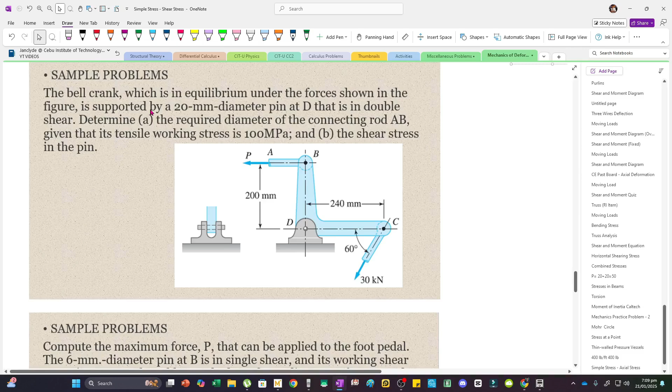Now, this problem, where did this come from? This is from the midterms of CC2 in my batch. So, this is a famous problem in CITU, especially when you're already a 4th year.

The bar AB is supported by a frictionless inclined surface at A and a 7/8 inch diameter pin at B, which is in double shear. Determine the shear stress in the pin when the vertical 2,000 pound force is applied. Neglect the weight of the bar. So, assume this as weightless, and this is an applied force of 2,000 pounds.

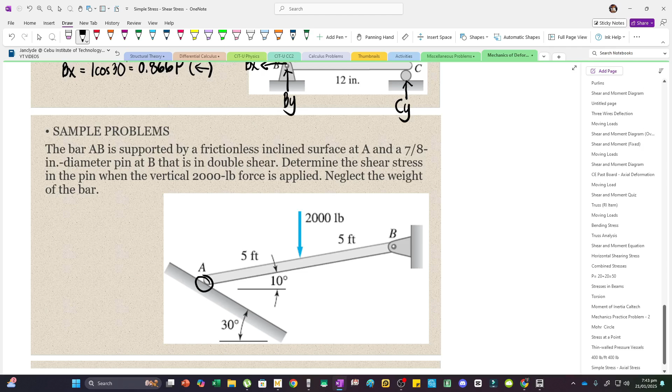Now, what's our approach here? This is a frictionless inclined surface, so that means we have a normal force. It will point outward, perpendicular to the surface.

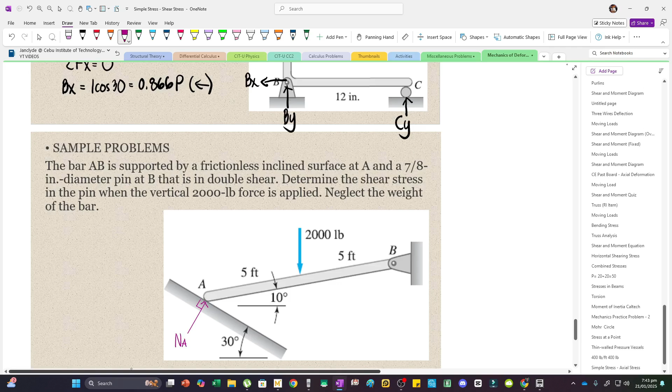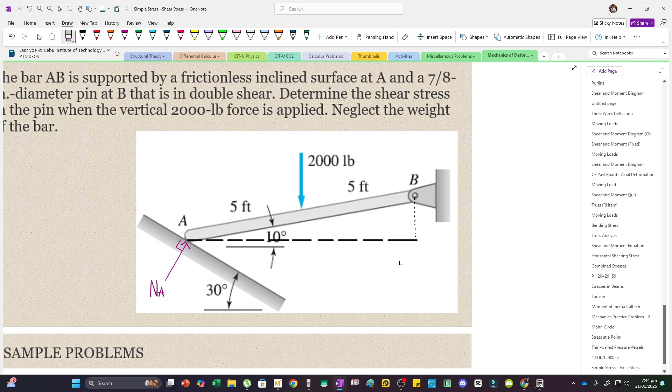Let's place it for now. There, perpendicular. Let's label that as NA. And then what we can do here is form this triangle using a broken line. So, the NA is inclined.

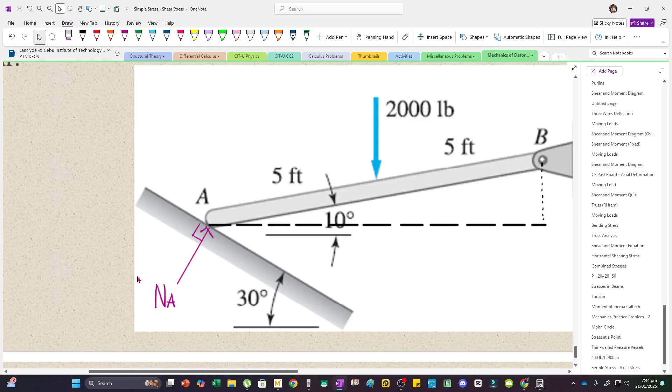It has components. To make the angles easier, you can draw a vertical line here. So if this is 30 degrees, we can form this triangle. If this is 30 degrees, then what's this other angle? I hope we agree this is 60 degrees. Let me also put the 30 here.

Now if that's 60 degrees, this is perpendicular to the surface, so that angle must equal 90 degrees. Therefore, 90 minus 60 gives us 30 degrees with respect to the vertical. So that's our angle.

So the NA has vertical and horizontal components. There's a vertical component acting upward, and a component acting to the right. Now this is our reference angle. If this is our reference angle, this is the adjacent side, so this would be NA cosine 30 degrees.

Then this is the opposite side. If you draw a triangle parallel to this line, that's the opposite side. Therefore, this is NA sine 30.

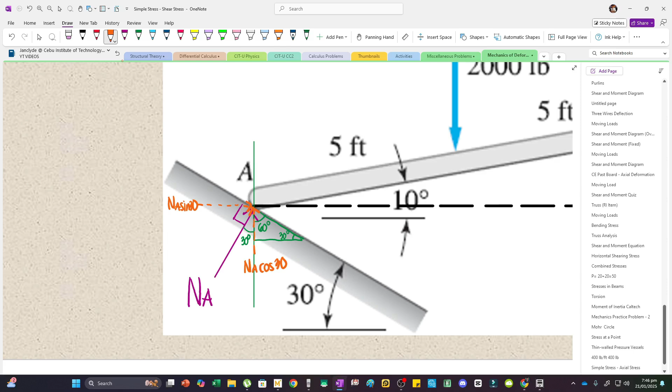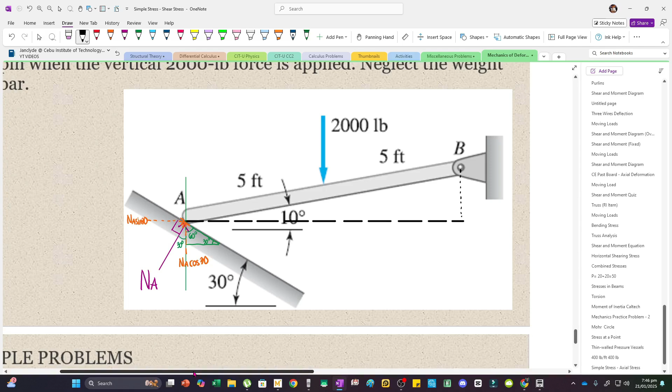Now we've resolved the force into components so that we can take moments about this point, at point B, since NA is just one unknown, we can solve for it. So, summation of moments about point B: we would have NA cosine 30 first.

This will cause a clockwise rotation about point B. If you hold it and apply this force, it rotates clockwise. And what's our moment arm? Our moment arm is this length. Now, we know the length of the bar.

10 feet in total. The inclination from the horizontal is 10 degrees. This is the adjacent side, so this would be 10 cosine 10 degrees. I hope we agree. And the vertical distance would be 10 sine of 10 degrees. So for NA cosine 30, this is the moment arm.

10 cosine 10, let's multiply these. Let me color it - the force is in yellow, and the moment arm is in pink. The rotation is clockwise. For this one, if you hold it and apply this force, it rotates counterclockwise, so we have to use minus.

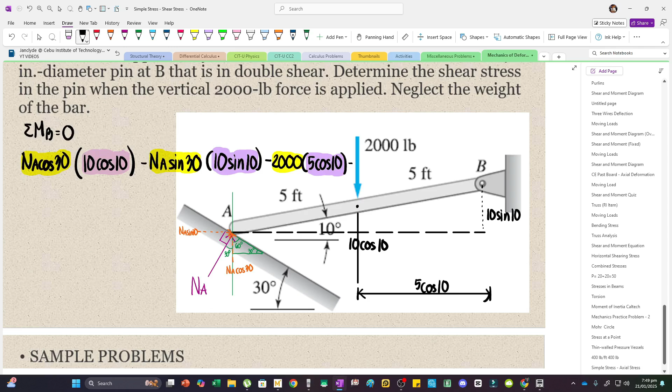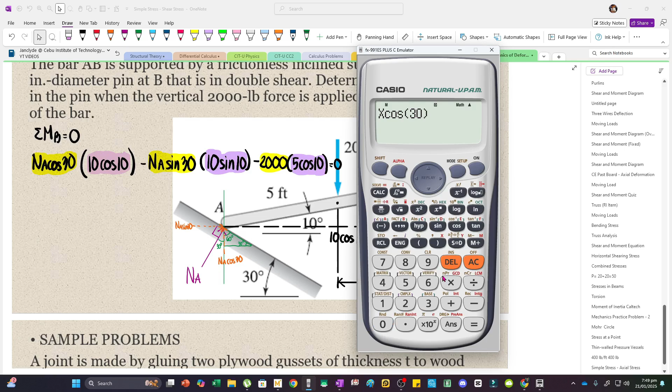So solving for NA, we would have x cosine 30 times 10 cosine 10, minus x sine 30 times 10 sine 10, minus 2,000 multiplied by 5 cosine 10, equate to 0. Solving for NA, this is 1285.58

And this is in pounds. Now that we know NA, we can also solve for Bx and By, since we have reactions there.

Let's say this is BY, and this one is BX. Now, summing up forces along X, we would have NA sine 30 minus BX, this one, equal 0.

But we already know NA, which is 1285.58. So BX is this value, times sine 30.

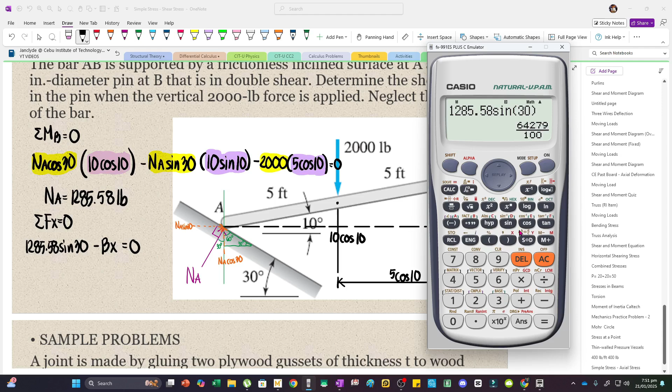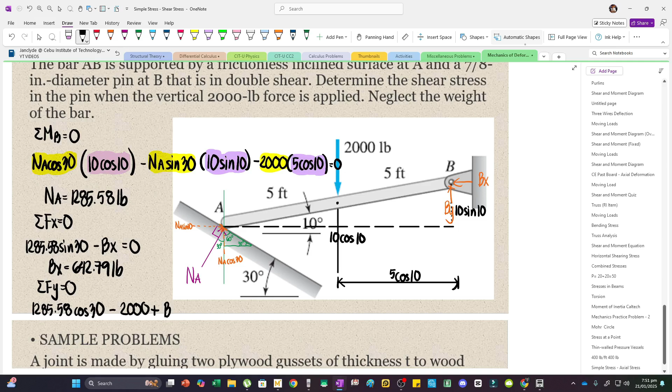So, 642.79 pounds. And then, summing up forces along Y, we can obtain BY. So this is now - what's NA? 1285.58, times cosine 30 - that's the vertical component going upward. Then minus 2,000, since that's downward. Then plus BY, let's equate this to 0.

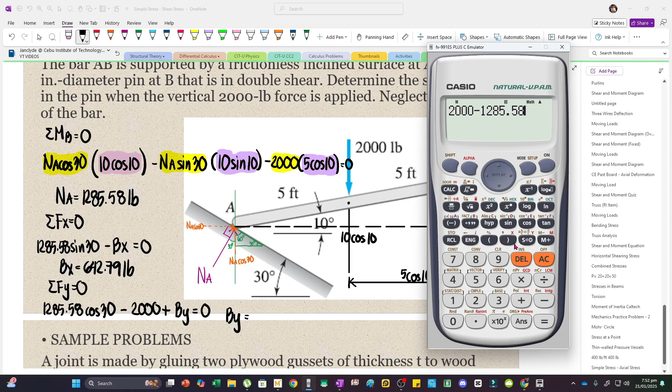So solving for BY, this would be 2,000 minus 1285.58 cosine 30, which is 886.66, also in pounds.

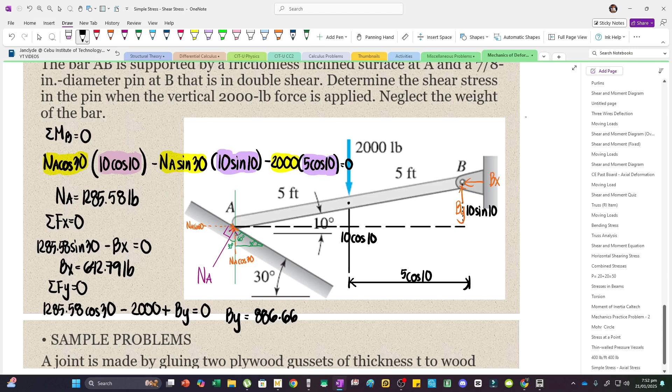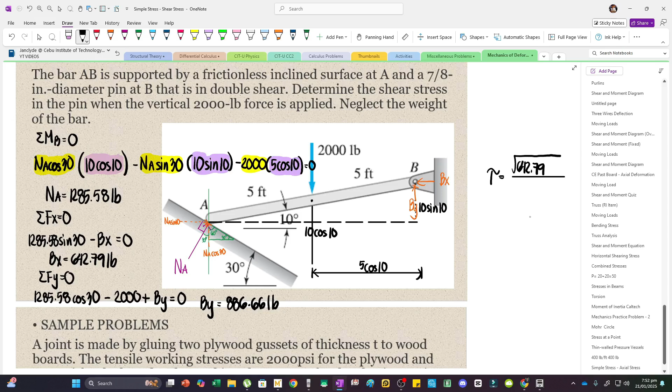Now, shear stress in the pin at B. So for shear stress, again, the shear force it carries is the resultant force of Bx and By. So shear stress equals square root of 642.79 squared plus 886.66 squared.

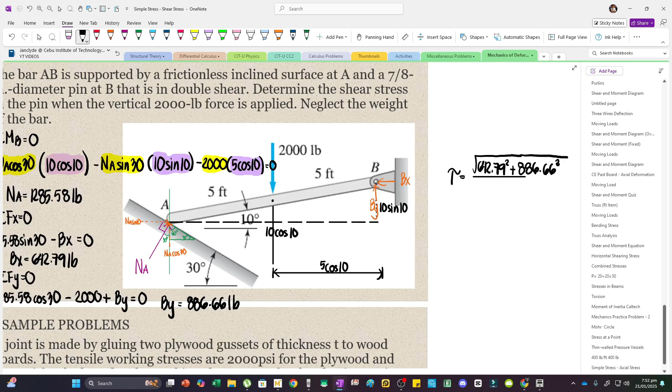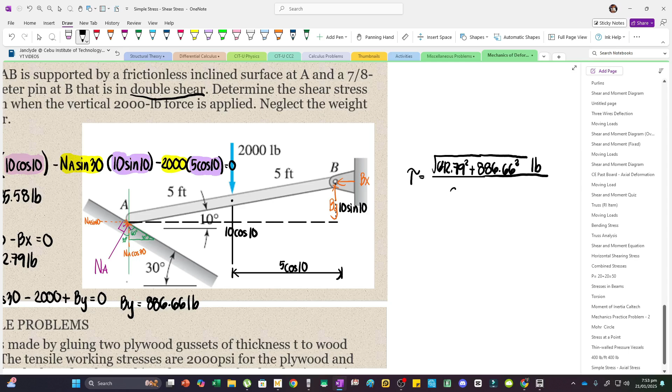This is in pounds, divided by the area. Since it's in double shear, times 2, then pi over 4, the diameter is 7/8 inches, squared. So, square root of 642.79 plus 886.66, divided by 2 times pi over 4, multiplied by 7/8, squared.

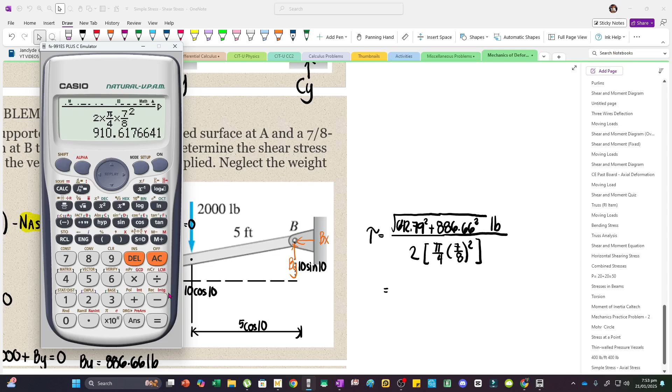So, 910.62, in pounds per square inch, since this is in inches squared. So this is PSI, pounds per square inch.